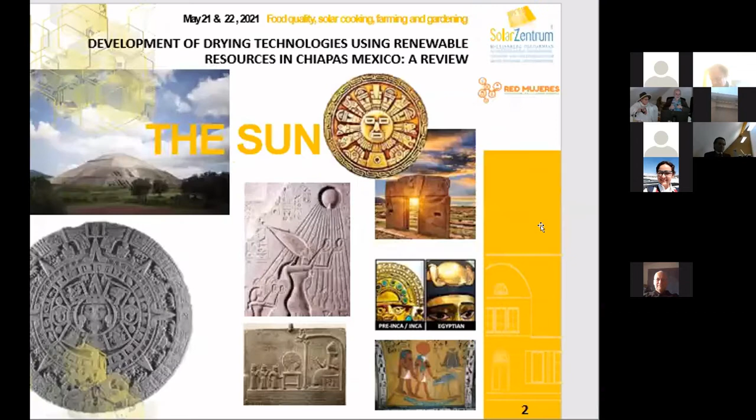The sun is our main reserve of energy, in the world, and it's been so important in our culture.

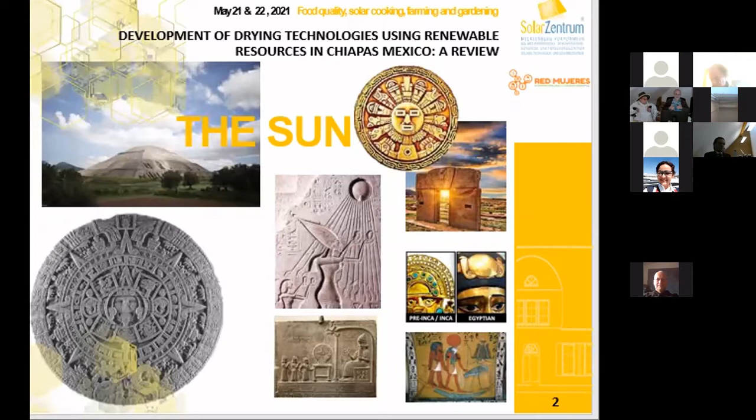I would like to introduce myself as an agent of change and a promoter and activist for the renewable energies. I really love solar energy, so I am glad to be here.

I studied renewable energy engineering in the Polytechnic University in Chiapas, where I fell in love with solar energy. I also was working in a solar company in Chiapas for 5 years.

I also run solar cooker workshops with Red Mujeres and also by my own. During my free time, I develop, build and evaluate solar dryers and solar cookers, and also support solar food processing.

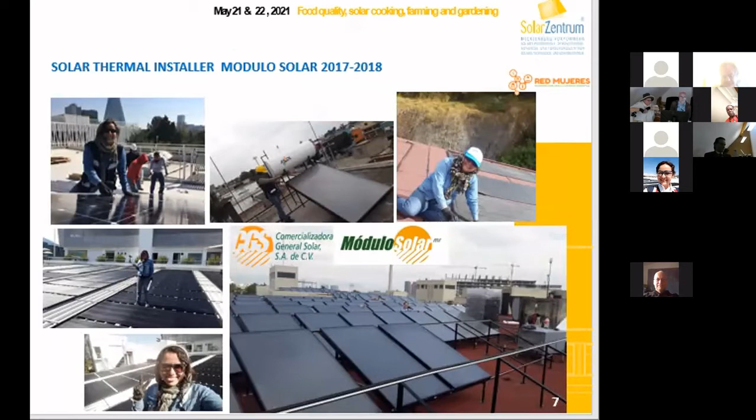From 2017, I was a solar thermal installer in Módulo Solar, a Mexican company. Nowadays I work as a solar thermal project engineer in the same company. This company develops turnkey projects for solar water heating systems in residential, and also solar heat for industrial process, hospital, restaurants, and any other sector that needs hot water.

This is the work that we do in the company.

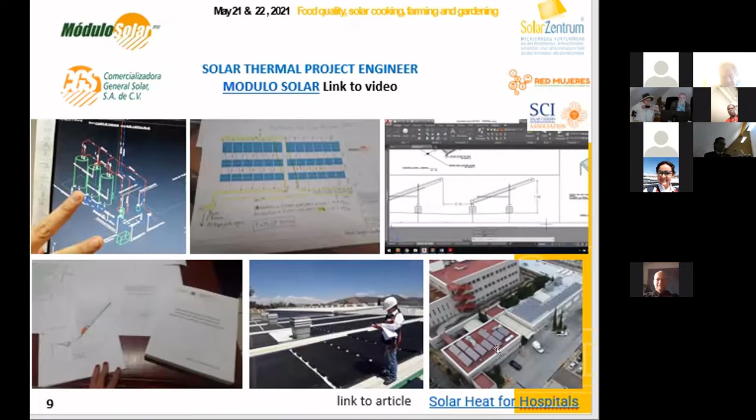Solar woman. In 2016, I traveled to Mexico City to be trained and to get a competent certification in solar installation of water heater systems in homes. This system was for homes, and I became part of the solar training woman course.

This project led by German Cooperation in Mexico won a prize in Gender Week in German Cooperation, and naturally Red Mujeres was born. But what maybe you are going to ask, what is Red Mujeres?

Red Mujeres is a woman network in renewable energies and energy efficiency. Red Mujeres' purpose is that women should be able to contribute to the energy sector with their knowledge and skills in equal condition with men, and to reach their full potential and grow in the pathway.

Thanks for the attention in my introduction, but now we will come back to talk about solar drying in Chiapas. I will start to talk about the background and the influences in the design of the solar dryers developed in Chiapas.

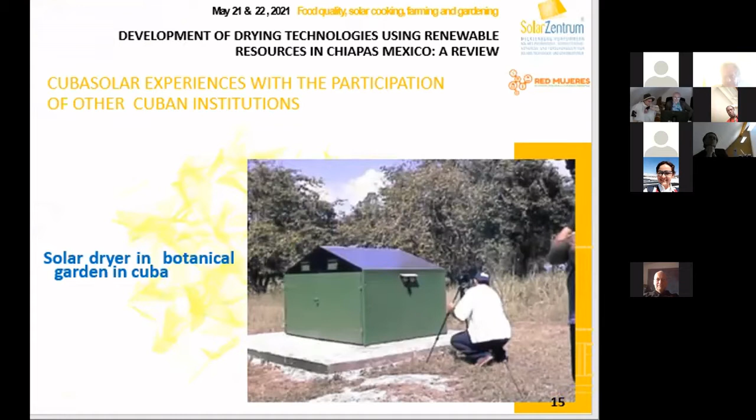Cuba Solar presented their experience with other institutions, and here we can see a cabinet dryer in School City, Camilo Cienfuegos. We can also see this cabinet dryer in a botanical garden in Cuba. This is also another dryer built in Cuba and reported by Corp Linares in the literature.

Here I want all of you to look at the walls and the material of this solar dryer.

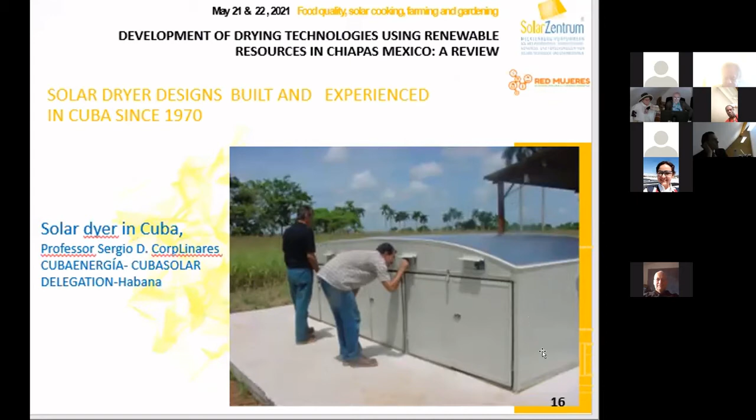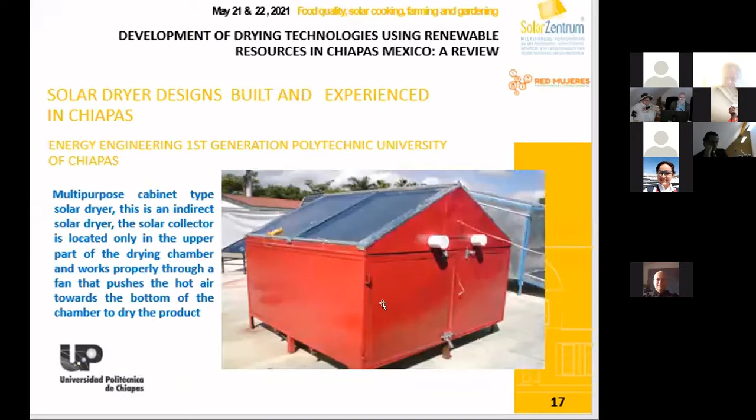This is another dryer very similar to the one before from Cuba, and it was built by students from the first generation of my university. They were in their second career year, so the solar dryers are very similar, as you can see.

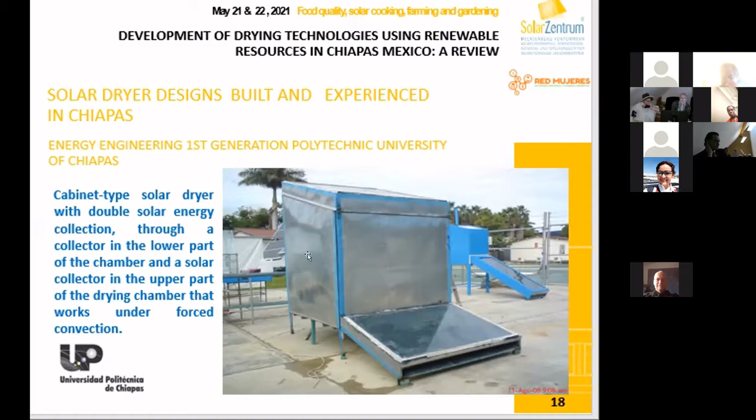Also we can see this other solar dryer, also built by the first generation in my career, which has two plate collectors to heat the air, one in the upper and other in the lower part of the drying chamber. All the dryers were displayed in this nice platform of solar devices that was in my university.

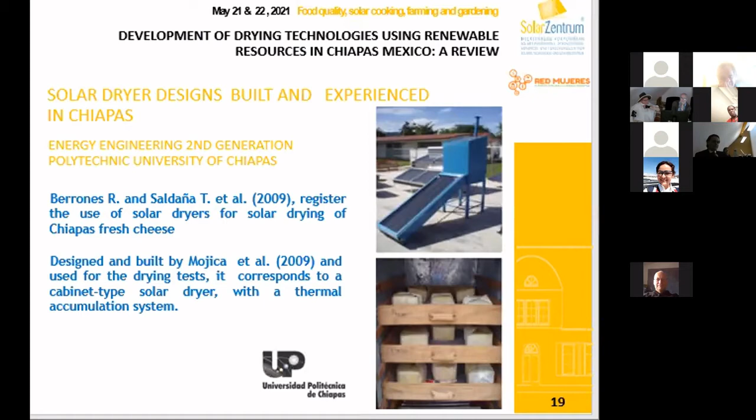Now I would like to talk about the Chiapas fresh cheese solar drying. This is the main work that I was doing in solar drying.

I would like to tell about the fresh cheese. What is fresh cheese? It has a smooth flavor and consistency, and this is a double milk white cheese, like little salty and little acid.

This is the most common presentation when the cheese is fresh, and in this way it has a short expiration, and storage in refrigeration is necessary to prevent the decomposition.

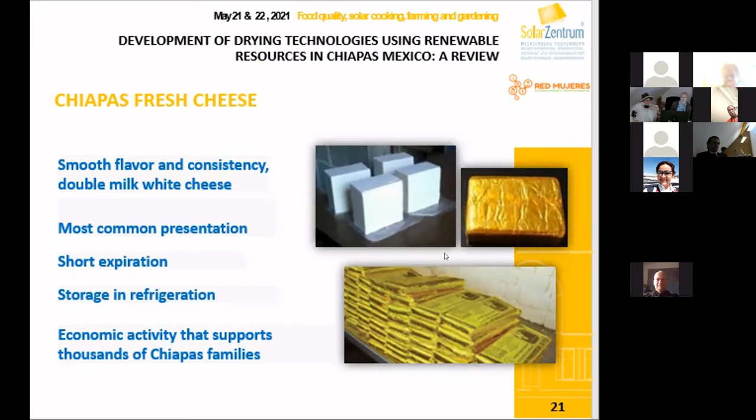But if we remove the water in the cheese, we can obtain a powdered Chiapas dried cheese, and it can be used in many applications like pastries, antojitos, and a wide variety of homemade food in Chiapas.

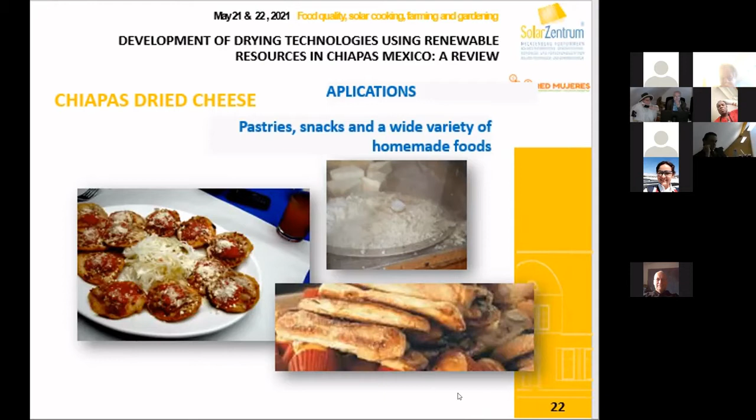But the traditional method in Chiapas uses a traditional method: mesh cabinets to dry the cheese, but the process is very long. It can take from 1 month to 2 months with good climate conditions. This is the most economic method and widespread in Chiapas because of their simplicity. And sometimes the cheese can just be disposed directly on tables in the house.

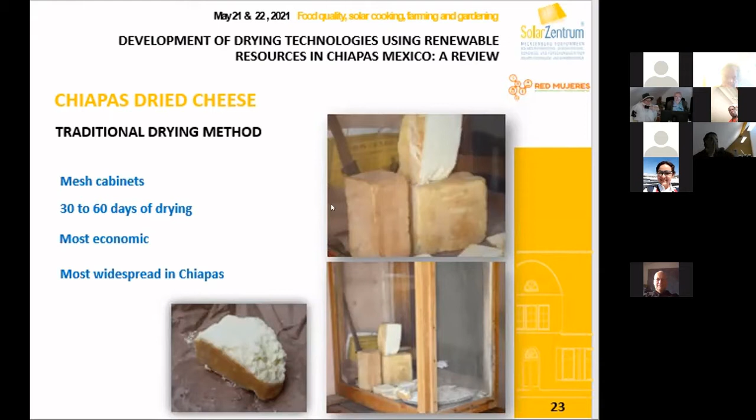But the traditional drying of cheese has some complications or difficulties. The community where the solar dryer is located is in a rural area near a rainforest reserve, and the climate and the humidity in some periods of the year is cloudy. This reason complicates the traditional method, extending the drying time and exposing the cheese to mold, as you can see here.

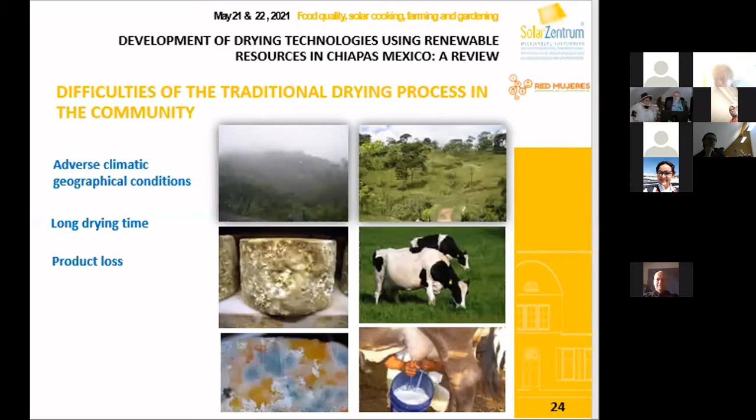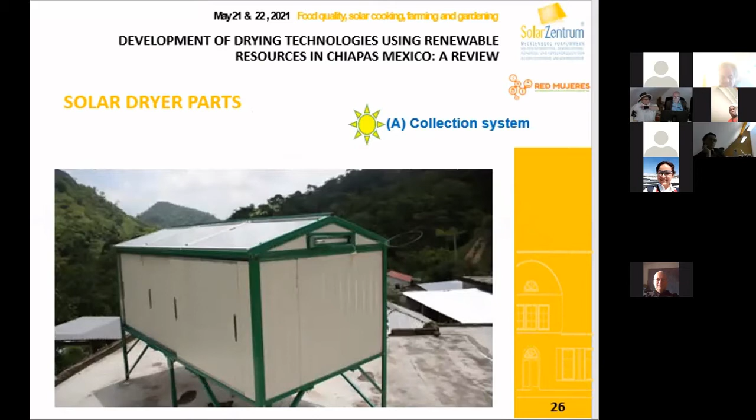Now I would like to mention most of the parts of the solar dryer. This is the collection system, which is a triangular heat air collector in the upper part of the chamber. The cover glass retains the heat in the heat air collector.

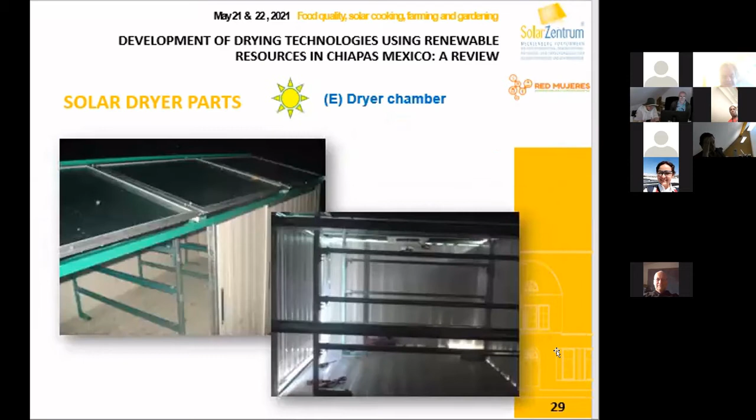The corrugated absorber plate is the one we can see here, formed by undulating metal sheet. The flat absorber plate is formed by a metal sheet too. Here we can see the drying chamber and the tray rack, and the trays where we dispose the cheese.

The extractor or the fan helps to remove the heat air from the air collector in this place and push it into the dryer in the lower part.

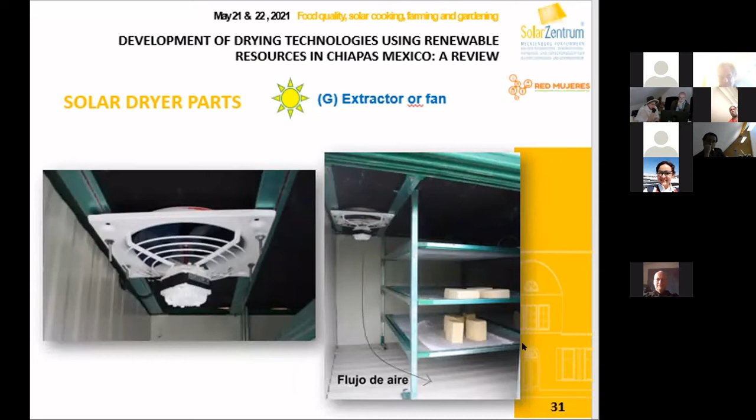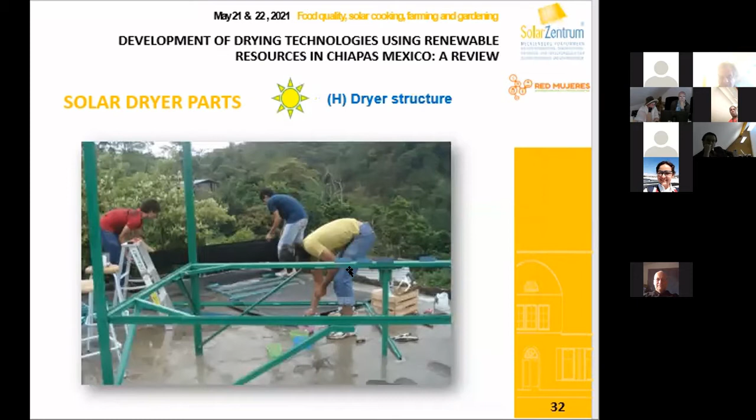Okay, this is the dryer structure as I mentioned. These need to be disassembled to transport in remote rural areas. These are the panels, and as we see this material again, like the Cuban dryer that I showed before, this is called Mutymuro, and we use it here in Mexico. It has the advantage that we can unite the parts of the metal sheet, of the metal panels.

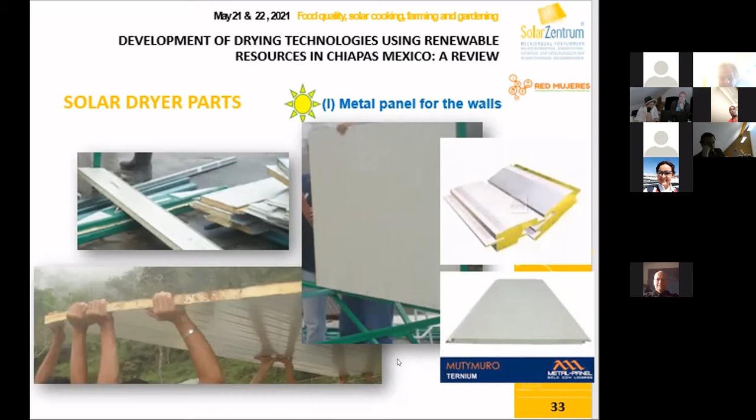And as I was mentioning, the fan produces the circulation of the hot air. Here we can see how the circulation between the air heating chamber and the solar dryer chamber is established. The fan extracts the air and pushes it into the bottom of the drying chamber. It's like a cycling process, and that's why the dryer functions, because we heat the air with the sun's rays in the collection system that is in this upper part.

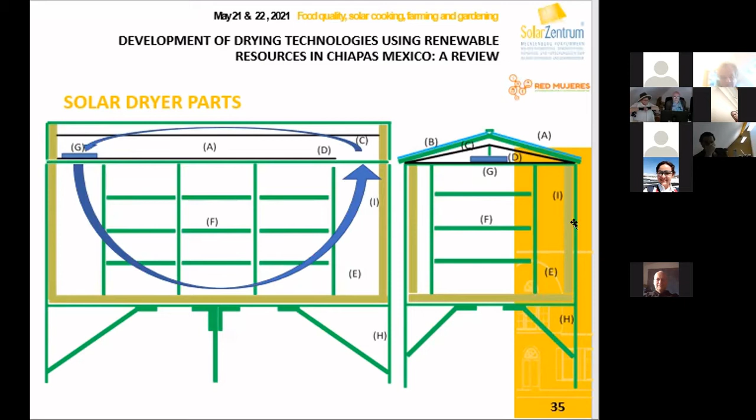Okay, and also we made an evaluation of the solar dryer, and we measured some atmospheric parameters like solar radiation, temperature inside the chamber, ambient temperature, and relative humidity. Also we measured dryer operation parameters like humidity and temperature inside the drying chamber, temperature in the two absorber plates, and temperature in the collector chamber. As you can see, we had a very poor method of evaluation, but we made some measurements.

As you can see in the graphic, this is the humidity. This is the ambient humidity, and this is the humidity in the chamber. So we have big differences between the two humidities. The relative humidity in the chamber was between 9 and 50%.

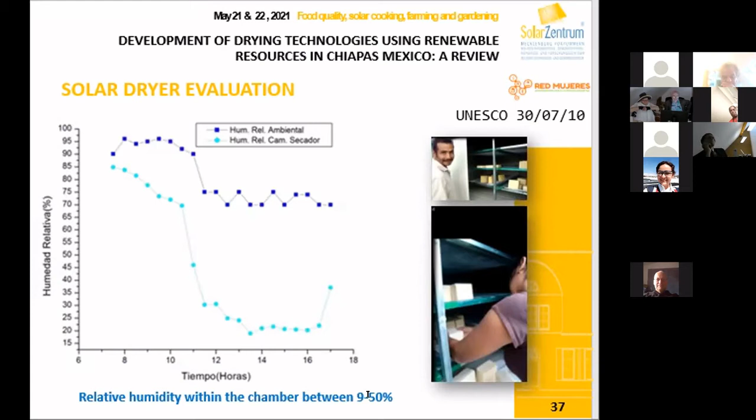Also here we can see the temperature in the dryer, but the most important is this red line that shows us the temperature in the drying chamber. As the graphic shows, the humidity in the chamber is less than the ambient humidity, and the temperature in the drying chamber can rise up to 50 centigrades.

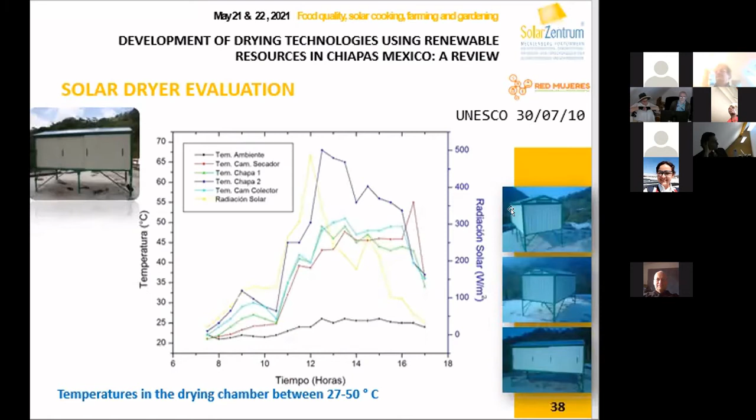And these conditions allow us to dry the fresh cheese in half of the time compared to the traditional method, in addition to improving hygiene conditions during drying.

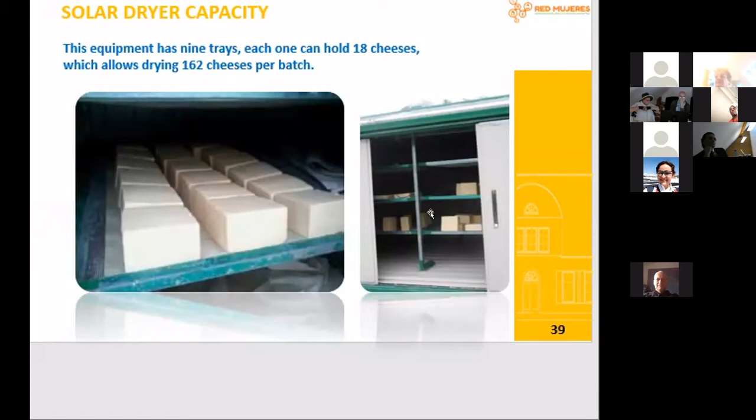This equipment has 9 trays. Each one can hold 18 cheeses, which allows drying 162 cheeses per batch.

This is a great project because the solar dryer is an opportunity to preserve cheese in times of abundance of milk. The milk halves in price, representing an economic advantage for producers through various savings, since they don't need to sell the fresh cheese—they have the possibility to keep it and sell it later as dried cheese.

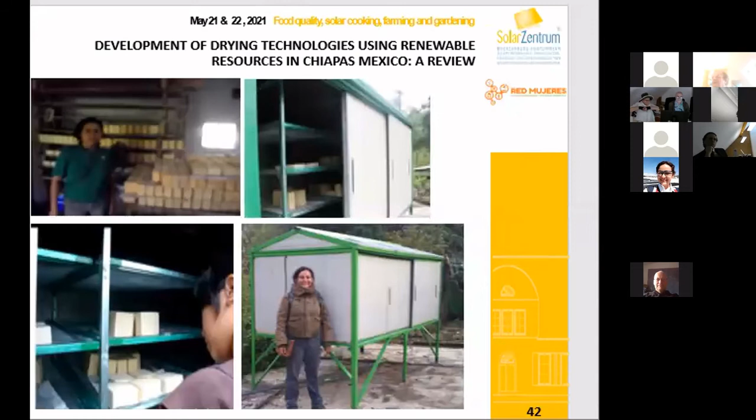After I finished university, I studied a master's degree, and then I used this project, this dryer, to elaborate my thesis project. I also made a poster presentation in Cocina Solar at the Solar Cooker World Conference in 2017. For me, it was amazing to participate in this project, and I believe it was a successful approach to introduce solar technologies to this process.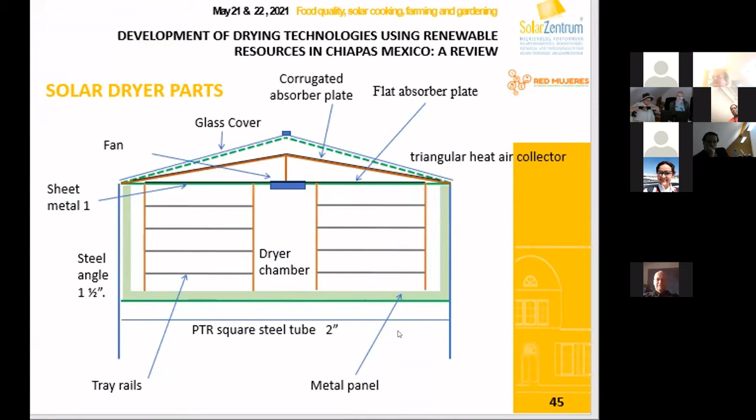It also has a triangular heat air collector, with the same parts as you can see: glass cover, corrugated absorber plate, flat absorber plate, the triangular air collector, and the other parts. This is the door of the chamber, the metal panel, and the tray rails.

Here we can see how the circulation between the collector chamber and the dryer chamber produces the circulation of the air. This is like the fan—the fan pushes the dry air and makes this cycle. And as we know, the solar radiation heats the air in the chamber of the collector.

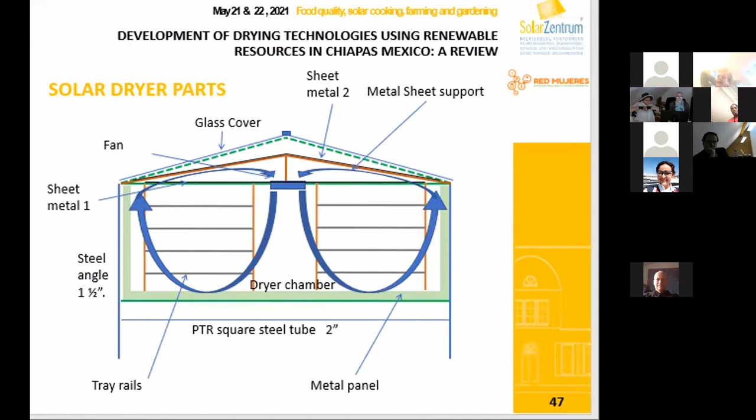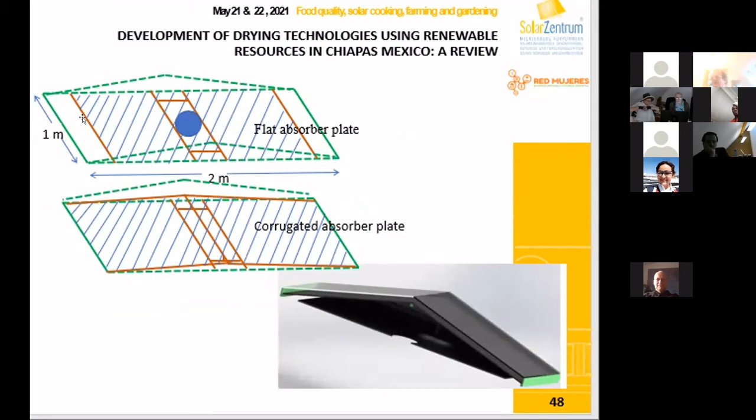This is another diagram of the triangular flat plane, the triangular air collector. It has a flat plate absorber and a corrugated absorber, and the circulation occurs because we have these gaps.

Now I would like to talk about the solar thermal wind hybrid dryer. This dryer was manufactured by the company I was working for, Chiapas Solar, but it was also the thesis of a colleague, Guadalupe. She made all the design and the study of the solar dryer, and I was involved in the construction.

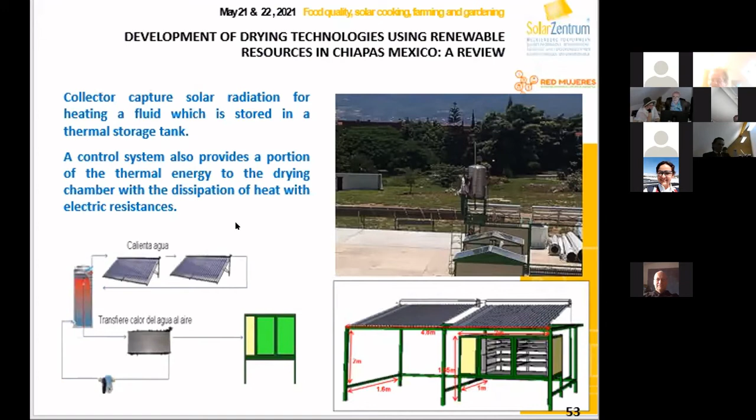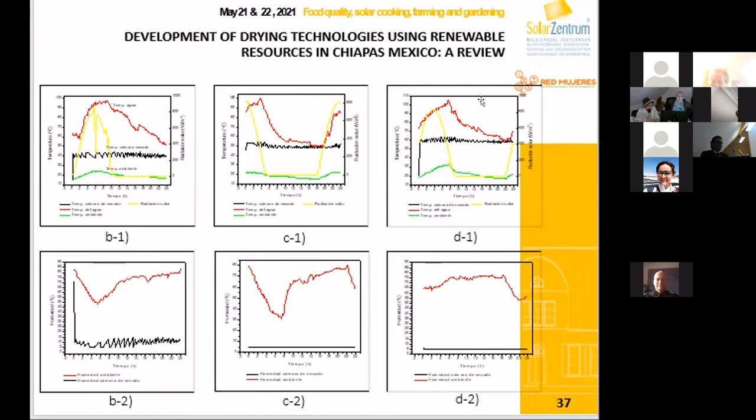This was a paper that we made with some colleagues from the university, and it was published in a Mexican journal.

Here we made the simulation of the drying process, and we tried to fit some equations - Newton, Page, and others - to the data. Here we can see the reduction of humidity, and in this case it was moringa, a plant. We measured the mass, calculated the loss in humidity, then fit the curve to some equations to obtain parameters of the drying process.

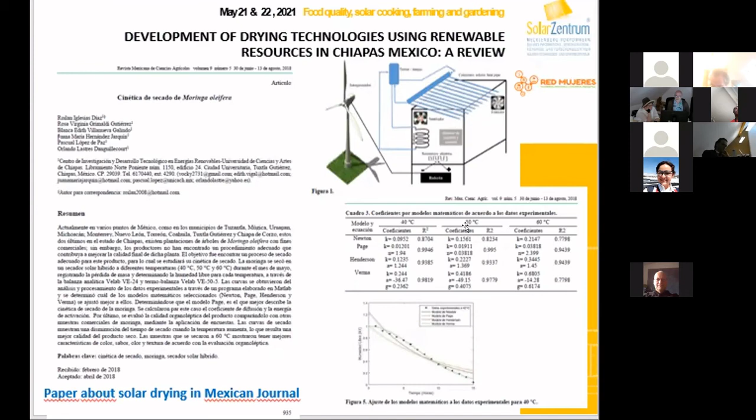I would also like to talk about the solar dryer for rural communities. That was the last work that I did when I was in Chiapas. This solar dryer is also a cabinet solar dryer, very small compared with the others, and has a fan fed by a PV panel.

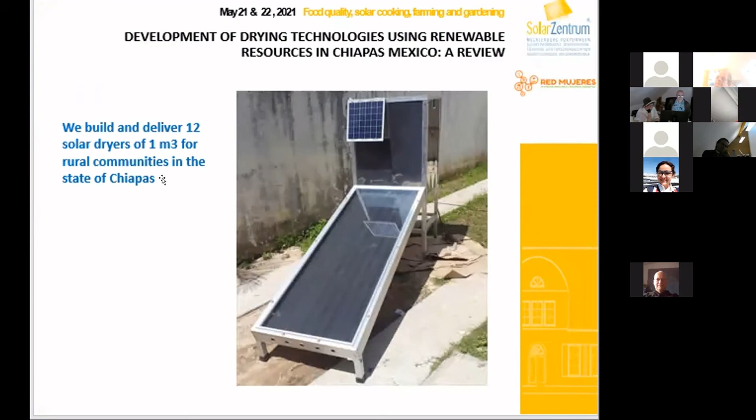We built and delivered 12 solar dryers of 1 cubic meter for rural communities in the state of Chiapas. Here we can see some pictures during the process.

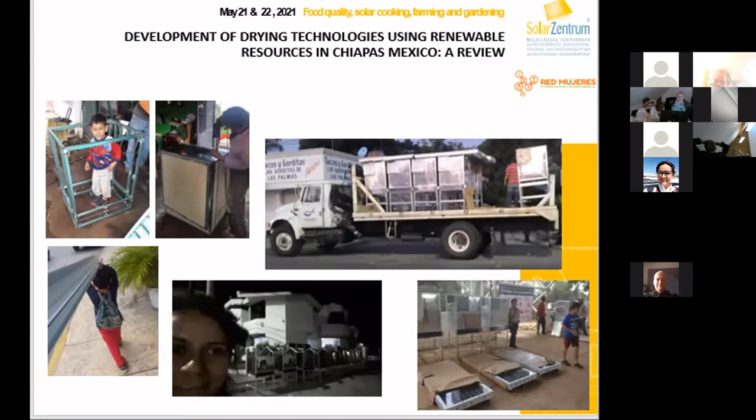I would also like to mention that nowadays I am working on a solar dryer, but this dryer was inspired by the work of other colleagues too. This is a cabinet solar dryer, but made from a different material, as you can see.

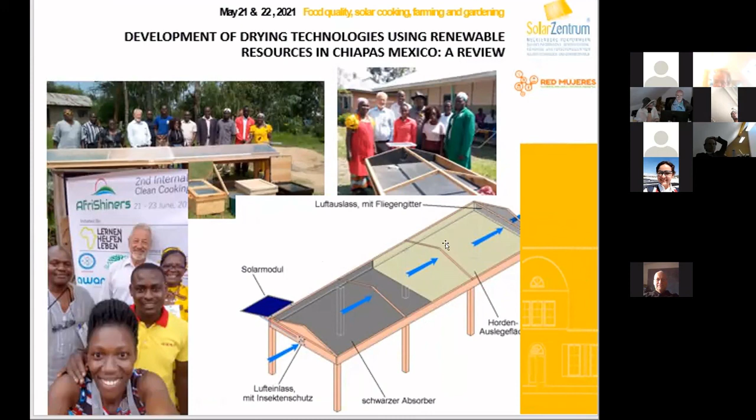This is also an inspiration from solar drying called La Sazón del Sol, and they are doing a lot of work in the solar drying process. This is the dryer that I am working on, and it's made from wood.

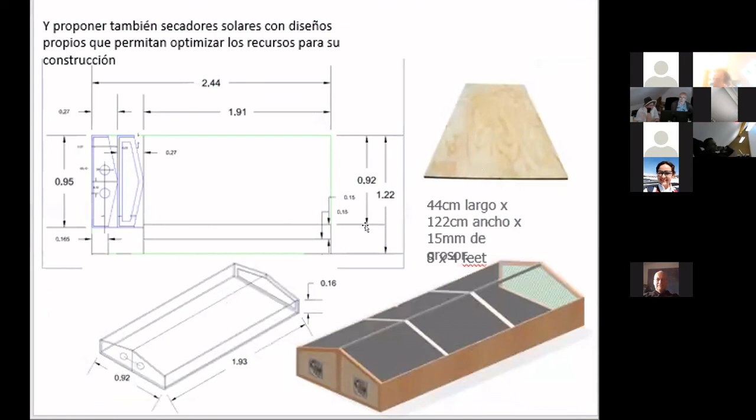I would like to present - this is my presentation, but I have some minutes, so I would like to mention some conclusions I have about this review of drying technologies in Chiapas.

We can see that the dryers were evolving from metal dryers - the first one was bigger, and the second was a little smaller, about 2 cubic meters.

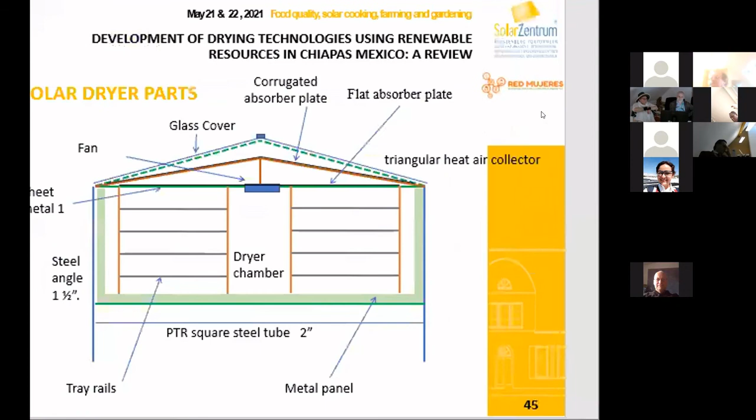I think these kinds of dryers are good, but we have some inconvenience, because the price of the solar dryer is a little expensive. Maybe the price of one of these dryers is around 40,000 pesos, so it's a little expensive.

This dryer was successfully implemented, but because the dryers have some economic support. Otherwise, it's hard to introduce, or hard to sell this dryer to rural communities.

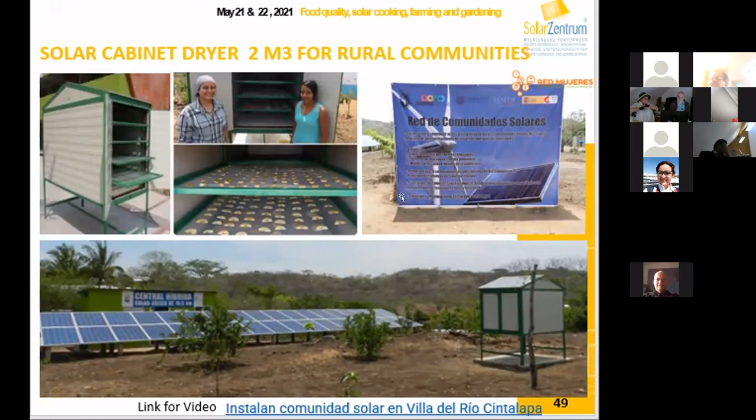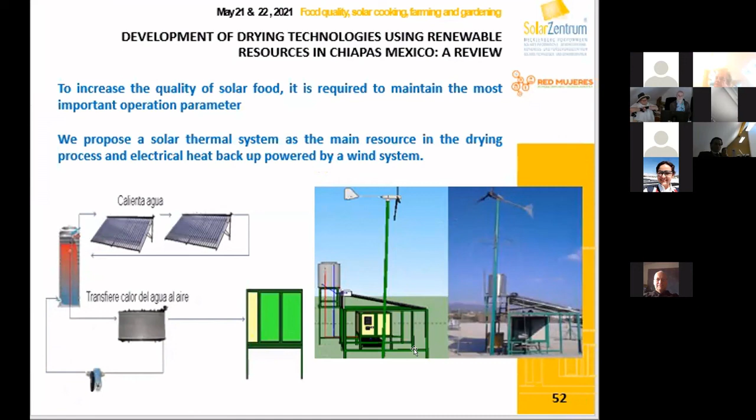I think it depends on the product, and it depends on the technology we can use. I mean, this dryer is very specialized - it has a wind turbine, thermal storage, a heat exchanger. This kind of solution resolves how to maintain the temperature permanently, but the problem is the high cost.

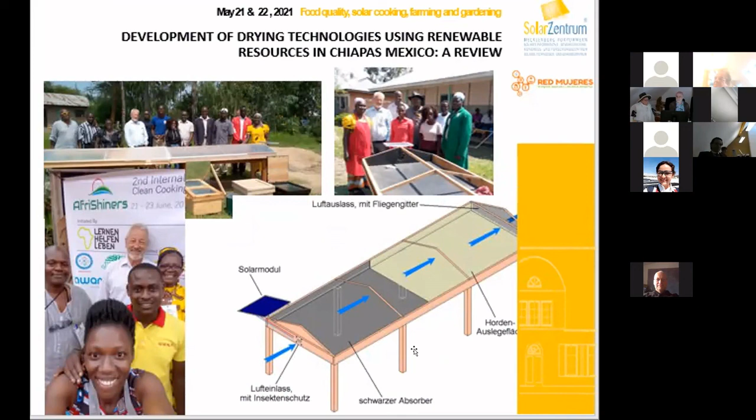In contrast, I think these kinds of solar dryers are also very good for drying, and it depends. If we need to dry some products that we can have at home, or dried vegetables or fruit at home, we can use a smaller dryer, even smaller than this one.

But if we dedicate ourselves to producing food, and have a lot of production, then we need maybe a more sophisticated dryer. But I would like to invite all of you to use a dryer, because we can do good things.

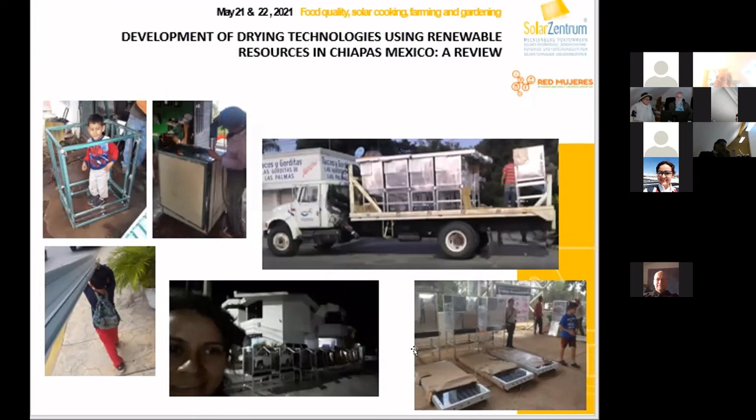As an example, maybe I can mention that I always have lemon and ginger dried at home, and we use them in several teas. So this is my presentation, part of the work that was developed in Chiapas, and I would really like to continue working in solar dryers. Thank you so much.